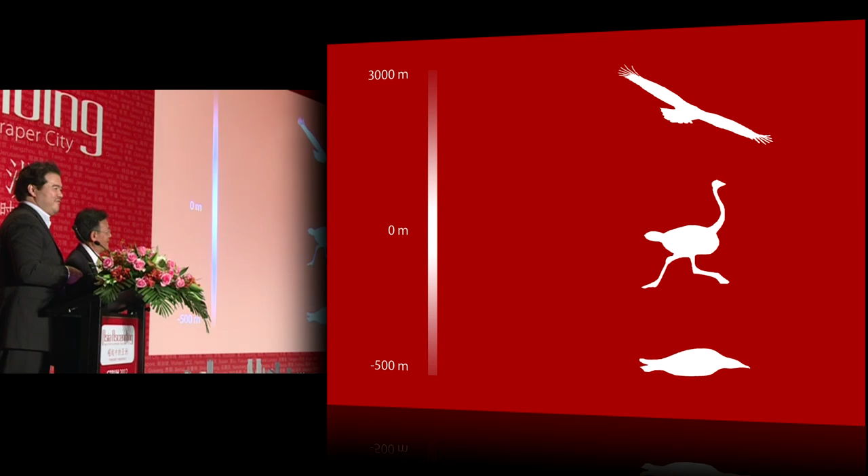not even Dennis Poon can get an ostrich to fly, okay, or a penguin to run as fast as an ostrich, although he might try. Because certainly he's one of the hardest working professionals in our industry. Could you do it, Dennis? Yes. But it might cost the client. We can negotiate that later.

Okay, so architecture and structure. So while on stage, Dennis and I might be very different sizes, on screen you can see our work is very closely aligned. Now more than any other building type, the tall building structure and architecture are inseparable. And it's not a question of passing the baton, the architect handing over the design to the engineer, but it's one of constant back and forth collaboration.

Hopefully these can run. Let's see. You mind clicking on the boxes?

There we go. Okay, this is the Chinese martial arts, Tui Shou. So I thought it was a nice representation of the dynamic between architect and engineer, but also it represents a very important aspect of Chinese philosophy, which is not to resist force with force, but to yield to it, to misdirect the force, and then to redirect it. And I thought that was a very nice analogy to how engineers design the structures of tall buildings.

Because the Chinese have understood for thousands of years, they have expressed the physical world in terms of energy. And I think only now, a lot of people at this conference were talking about the embodied energy of buildings, which Dennis will elaborate on, but the idea that there is a certain amount of energy that's inherent in the form.

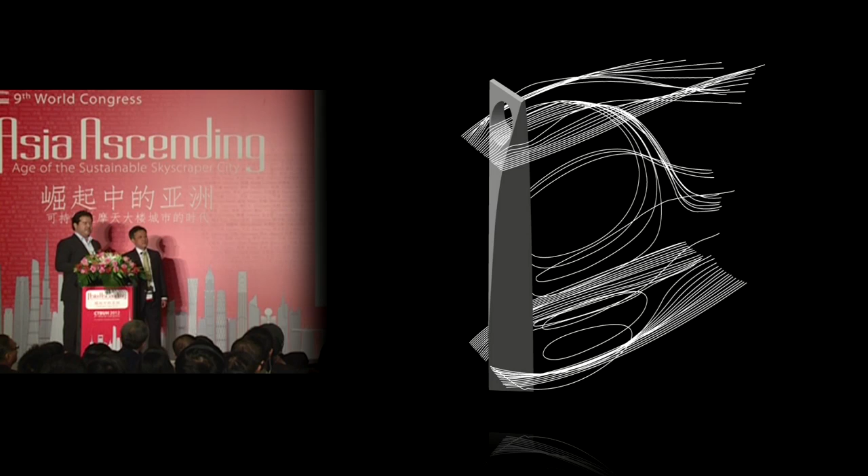Okay, this being a very important project for KPF and for myself, personally having worked on it, but the idea that the building doesn't resist the wind head-on, but yields to it, or more specifically, just allows it to pass through. The moon gate at the top, which was controversial, because it looked like, and this is not supposed to be the Japanese flag either, but this is a sphere. The sphere representing the most compact volume in nature.

So the ratio of the volume to its surface area is the most compact, and a lot of other forms might be compared to the sphere, and it's called sphericity, like how much does it deviate from perfect compactness. So when we look at the Shanghai Financial Center as a benchmark relative to Ping An, you can see the strategy here is to make the building as compact as possible. So it's as if the volumes or the spaces that weren't needed were simply carved away out of the building.

So the building transforms from office at its base, tapers back to hotel towards the top, and then finally at the observation deck, where pretty much you only need window frontage, it transforms into a line. So the idea that the transformation of the mass coheres to the transformation of the internal space is very important from the point of view of understanding that we're not wasting space. So we're not raising volume up into the air that would in turn take on more wind.

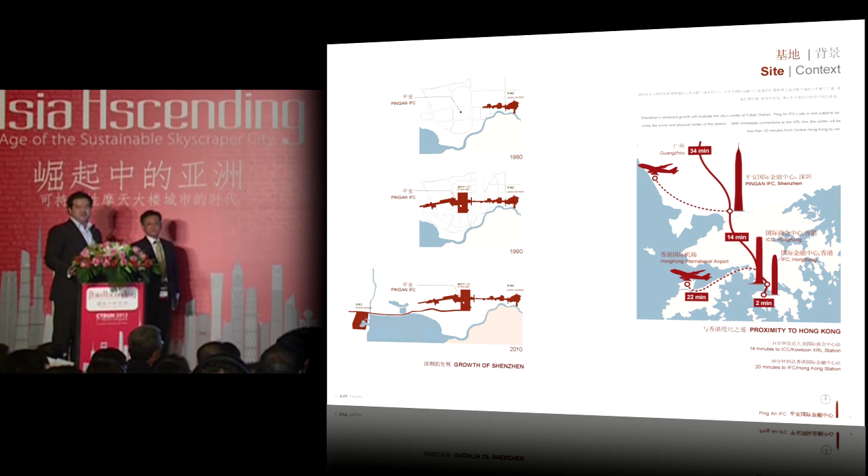Okay, so to understand the project, I think we should talk a little bit about Shenzhen and its context. So Shenzhen, unlike most large Chinese cities, doesn't have a history. It's not a traditional city. It was a village up until about 30 years ago, and then exploded because of its proximity to Hong Kong. So you can see on the diagrams on the left, the river is the border between Hong Kong and mainland China, and the city has developed from east to west, strung along the border.

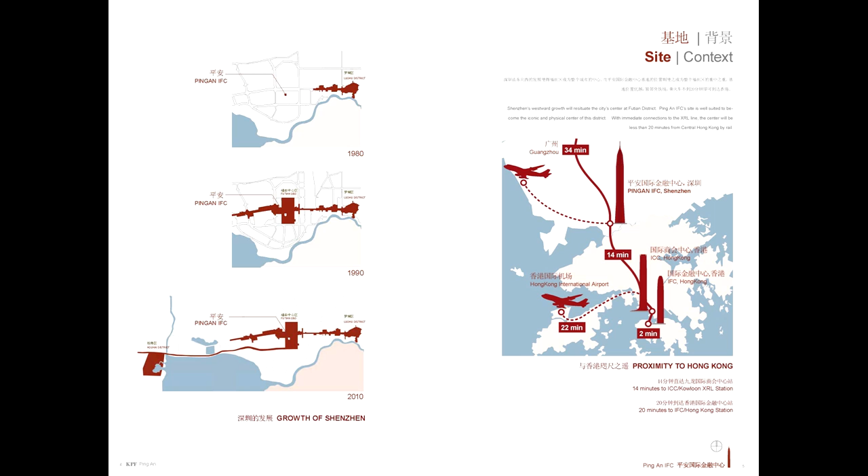This building also only makes sense when you understand it in context, not just of Shenzhen, but the entire Pearl River. So this diagram shows the connectivity of this tower to Hong Kong via the XRL, which is the new high-speed rail link that will go from ICC in Kowloon to this project in 14 minutes, which is probably faster than it takes to go from Pudong to Puxi. And incidentally, you take the train another 30 minutes and you're at Chris Wilkinson's project in Guangzhou. So these towers are not sprouting out at random; they're part of the infrastructure of the entire Pearl River Delta region.

Okay, now the brief of the project. The client asked us to do a couple things. One is that the tower form had to represent the stability and the solidity of their status as an insurance company. The second was that they wanted the form to express the spirit of Shenzhen. So Shenzhen, like I said, is not a historical city, but a city that was formed by immigrants coming from all over China, different ethnic groups, different languages coming together to build something great.

So the idea of lifting up the ground, the notion of pulling the ground up, and then the form of the building taking the path of least resistance, like the Tui Shou. So the form of the building becomes an expression of the material consistency of the building pulled down by gravity. And actually, when we were designing it in Rhino, a lot of times we modeled it upside down to reinforce these lines, to reinforce the idea of the folding of the building from top to bottom.

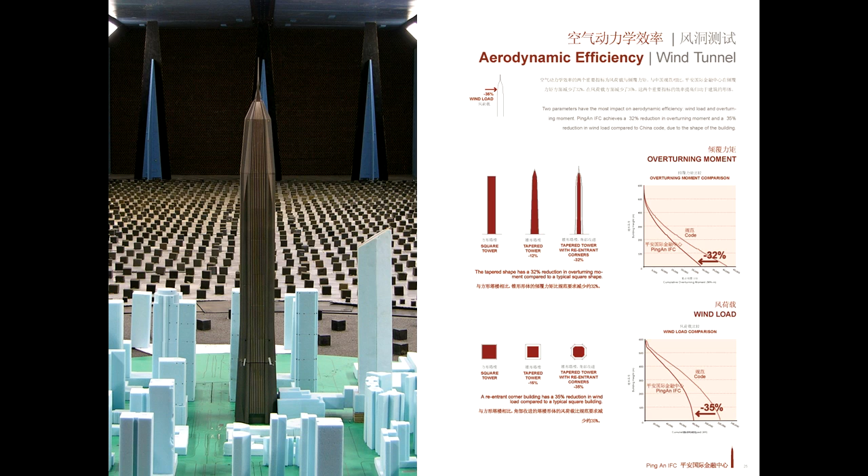And one could have done two things. One was pull the truss inboard, which would have wasted space, but that Tui Shou moment was deciding, why not just push the columns outboard and break the plane of the facade. And actually that had enormous aesthetic implications, but in a very positive way. And we wouldn't have thought about it unless we were listening to our engineer.

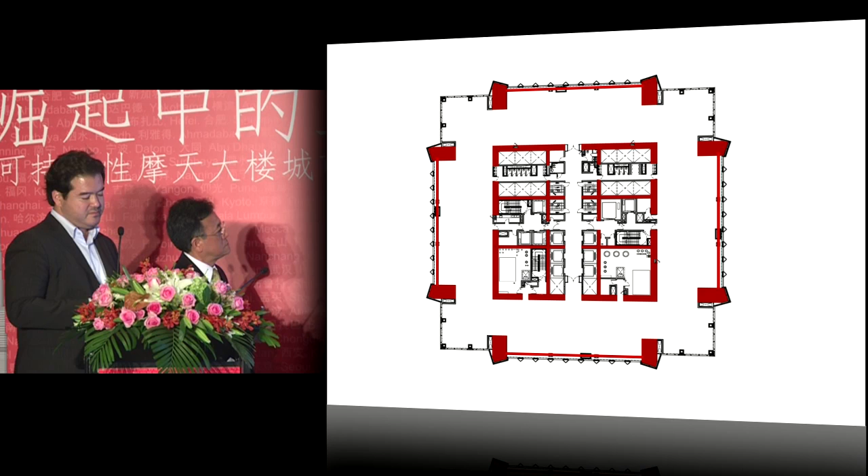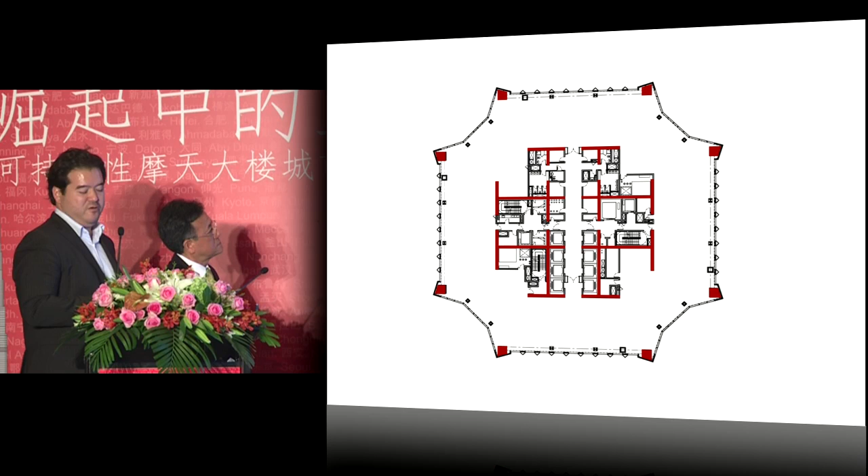Okay, so here you get the idea of the adhesion, so the structure sticking very closely to the face of the building. Okay, and then at the top of the building, you can see the transformation of the corners. So at the very top, we also bevel it, so the floor plate, in the perspective of the wind, is going to look like a circle. So the idea of a rounded floor that performs much better at the high wind speeds.

Okay, and then the transformation of the core as well. So as one manipulates the form for the wind, one also needs to think of its impact on the core. So the entire organization of the core transforms from a square to a cruciform, so that we eliminate that pinch point when we have to bevel the corners at the top.

Okay, and finally, to get to the top of the building, there's a spire at the top. So the spire was kind of vexing for me because it doesn't quite fit into the story of the sustainability and the minimizing of the embodied energy, but it's very difficult to resolve this form without a spire. It seemed to be the only natural way to resolve the form. And it generates complexities because of the galloping effect of the spire as it's blown by the wind.

So what we're looking at now as a team, and this is still ongoing, is to actually look at opening up the spire. So rather than a solid spire, it's a hollow spire. So again, rather than resisting the force of the wind, simply to let the wind pass through.

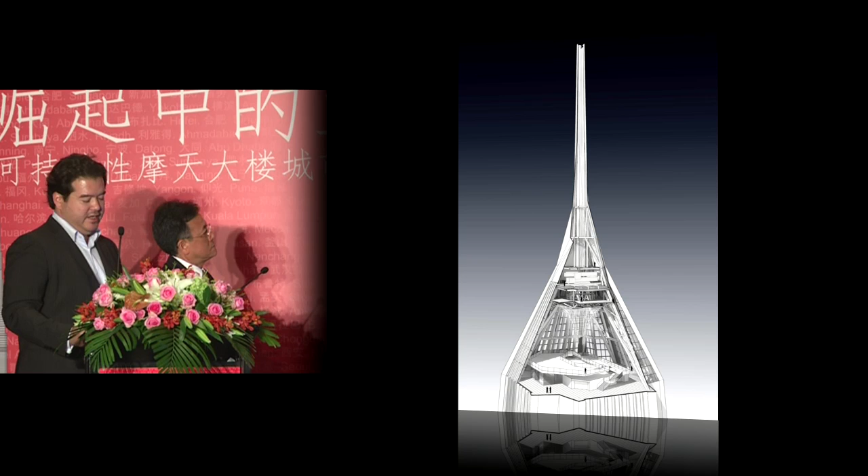Okay, and then finally, just to conclude a little bit on why go this tall. I think ultimately it's because we all enjoy it. As people, we enjoy going up to the tops of these buildings, and we work with the client to convince them to open up the top of the building to the public. So here you can see a cutaway view of the dome. It's a great cathedral-like space for observation and restaurants.

Okay, and finally at the end, the image is all about the people and the participation, the thrill of being at the top of a tall building. So images of my team sort of hanging outside the building with these glass bay windows over the cascade of the building face. So this participating in the tall building is what makes it truly enjoyable.

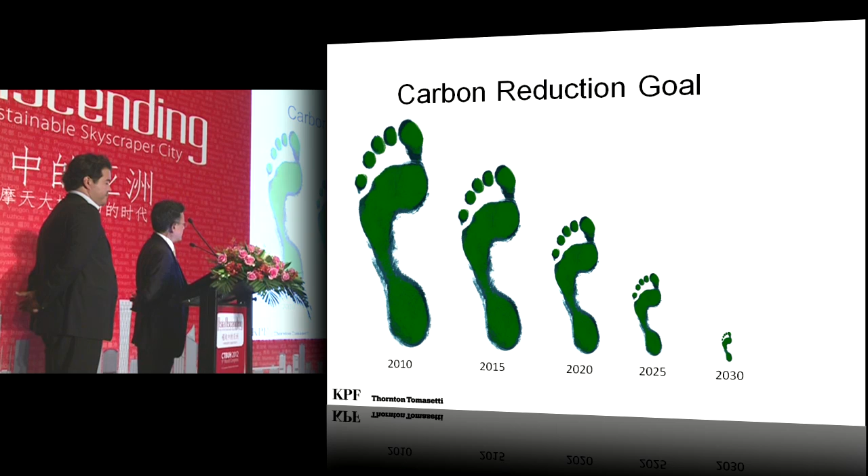So we have the carbon reduction goal. And in today's sustainable design, we talk about two major elements. One is the embodied energy, and the other one is embodied carbon. When you manufacture certain products, you use a lot of fuel oils to manufacture this product. And the byproduct of this manufacturing is causing a lot of carbon emission into the atmosphere.

So we try to limit this carbon emission. And that's why we try to use the right material, and also we have to limit its transportation and its manufacturing costs, because each one will contribute to the environment. Okay, you can see nowadays what is contributing to our carbon emission is in different areas.

Now, when we design the building, it uses up so much basic energy, because when you use a lot of steel, it consumes so much energy. When you use so much concrete, you also consume fuel. But after that, you're talking about the building operation, just like Mr. Job, the owner before. It costs millions of dollars to operate a building with mechanical system and operating system. So we have to pay attention to all of that.

Structurally, the envelope percentage, you talk about almost 28% of the embodied energy; site work, construction, finish, and structure accounts for 21. So we have to pay attention to every aspect. And during the design process, we go through this together with the entire team. Now you can see the energy cost.

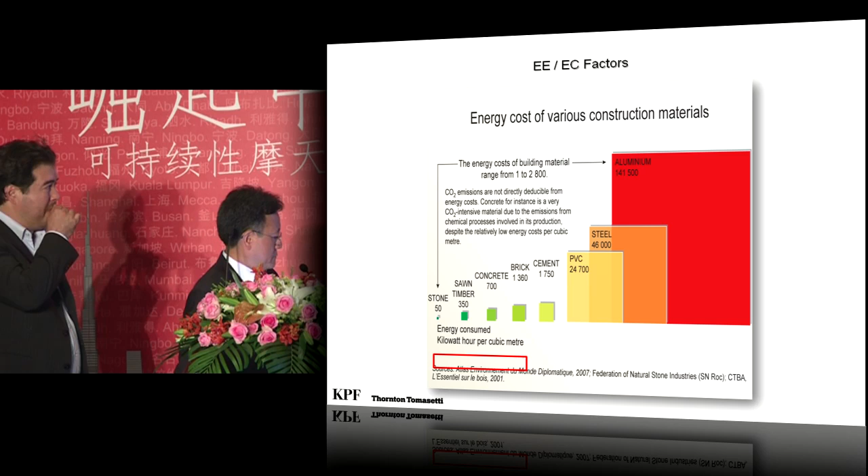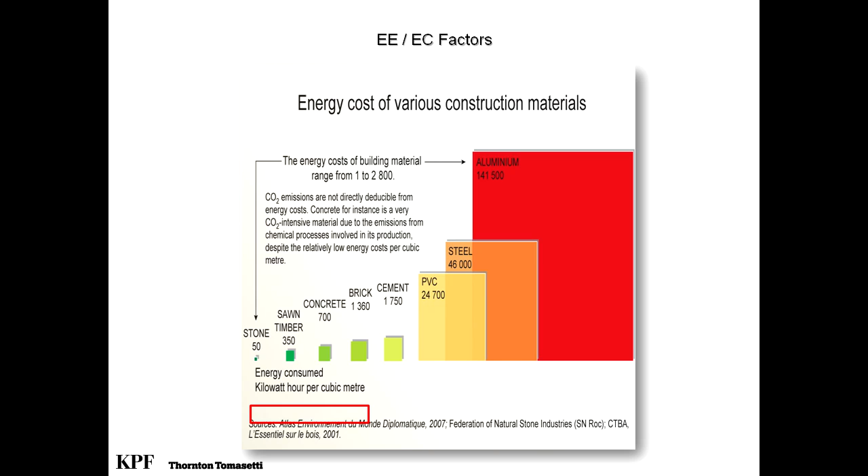If you use aluminum, it will cost this kind of energy. Steel is the second culprit. You use so much. PVC, and then if you use cement, you can see with cement, you use a lot, you have better environmental impact. And cement is much cheaper in China, and the labor cost is cheaper. So we try to strike a balance in the selection of materials.

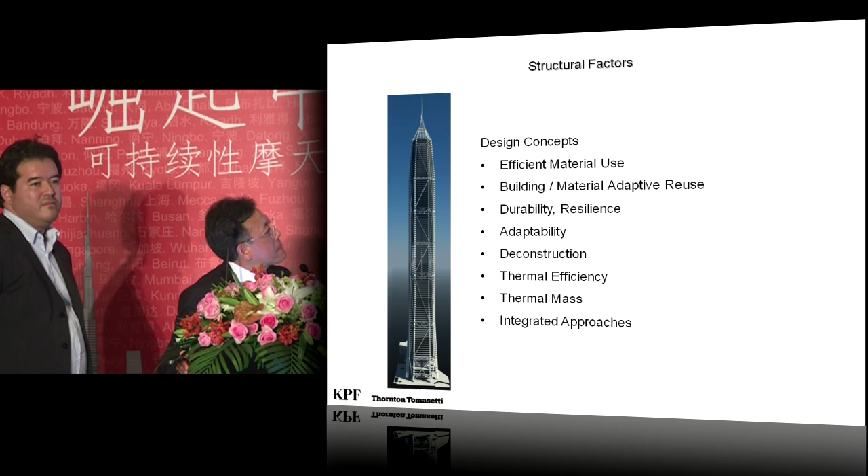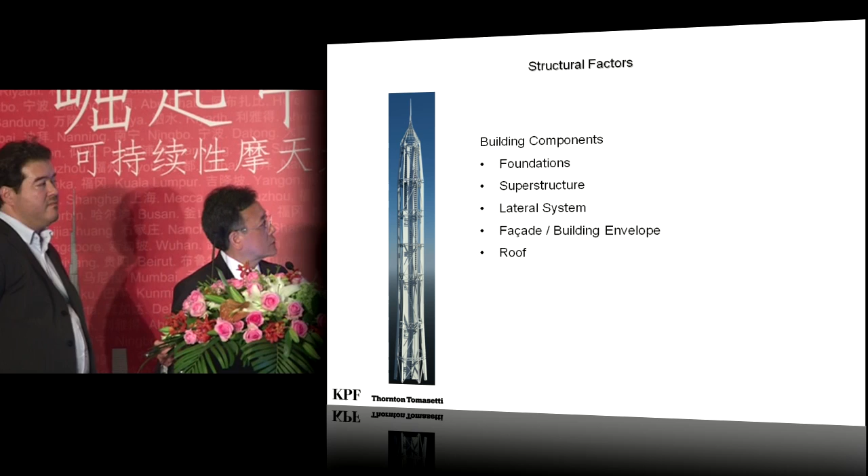Now, for this project, eventually, after months of work together as a team, we have to use the most efficient material, and durability, adaptability, deconstruction, and so on. Foundation is a challenge, okay? The site is very, very tight, so we cannot have a large mat. So we have to deal with foundation, then the superstructure has to deal with architectural requirements, and then the facade.

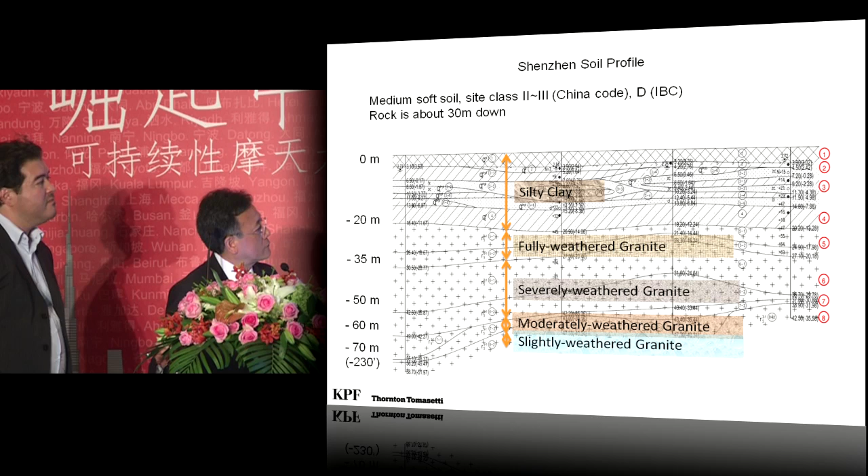To summarize it generally, we try to have a deep foundation with bored piles all the way down to the weathered rock. The mat is supported by the piles. Okay, we have the hand-dug caissons, and on top of that, we have a thick pile cap.

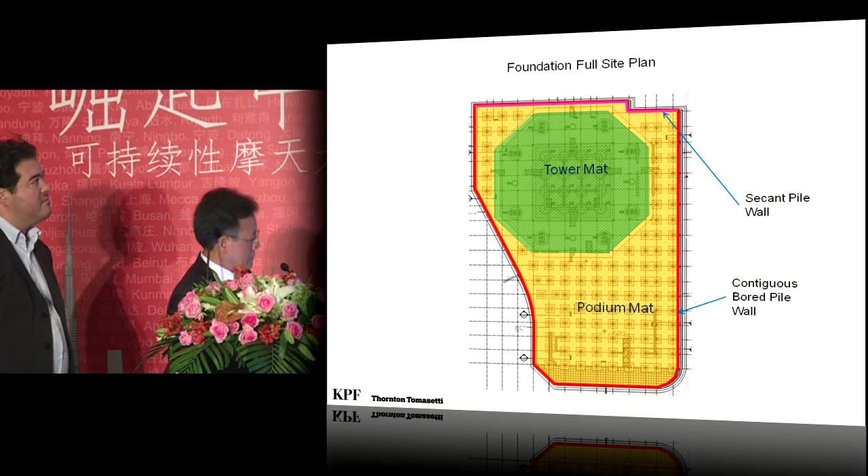Now, this is a layout, and we try to use big diameter bored piles in order to spread the load. And it saves a lot of labor by using deep bored piles and large diameter all the way down to rock. In the podium, we are using the regular smaller pile system. So what you see is a very simple outcome of engineering with a lot of analysis getting into it, with the optimized design.

And we study all kinds of behavior of the mat foundation, including the base rotations and so on, and flexibility and the spring constant. All kinds of engineering were built into it to make sure we have the most optimum design, not to waste any construction material.

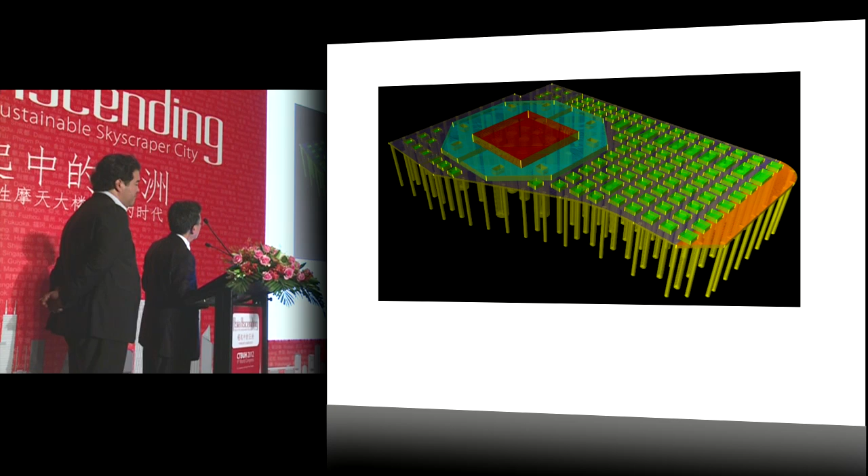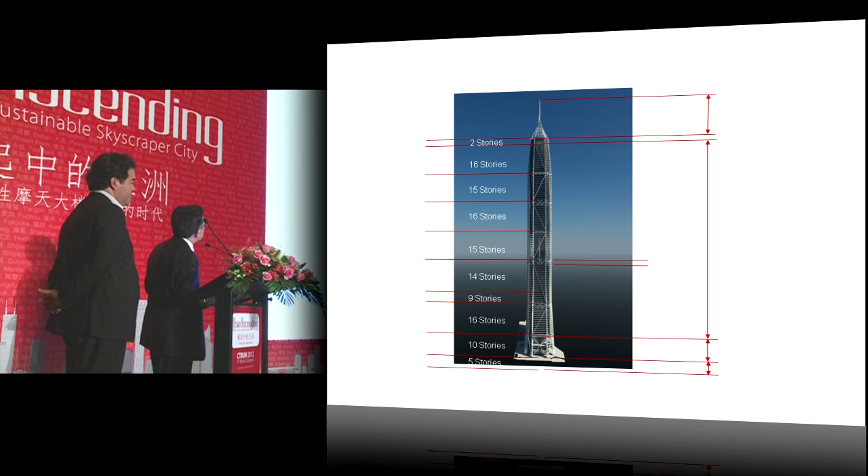Now the building is separated in different zones, and the structural system is mainly a concrete core, composite concrete core, working with outriggers, and also a mega frame outside formed by the belt truss. And in addition to that, we have a secondary diagonal bracing to enhance the stiffness of the building during earthquake as a secondary system.

Well, the main thing is architecture and structure to be in harmony. Every step along the way of engineering, we get to work with the architect, as David has pointed out. So the location of each outrigger truss has been carefully studied with numerous options when we come to this final design.

We have done a lot of three-dimensional analysis, with BIM modeling as well as 3D analysis, which enhances the optimization process with the architect and mechanical engineers. At the end, you can see what a simple engineering product and architectural layout it will achieve.

And if you look at the lateral system, we have the core. This is the mega frame formed outside, conveniently located at the mechanical levels, and then we have all these diagonal trusses. Even the truss configuration has to be worked out in a simplified way to fit the architecture in order to minimize the obstruction of view for this super tower.

Now, the concept of using an outrigger and a core is very simple. The core itself is not stiff enough for a 660-meter tall building. Just like when you try to bend a pencil, it's not stiff enough. But if you try to bend a pipe, it's much stiffer. So we work out the outrigger system, and with the belt truss. The belt truss is forming the mega frame outside the building, which forms like a frame for the secondary system.

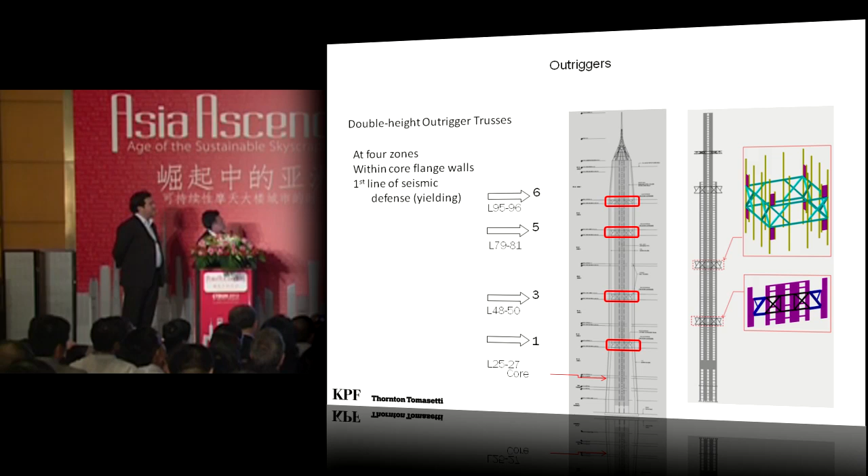This is the mega brace. Well, people will ask, why do you need a mega brace? Because is your core stiff enough? Is your bracing stiff enough? We have to deal with the China code. This is something that we can discuss later. Now, different codes have their own provisions, and different locations of the project will have their own projection. For this, in order to meet the seismic requirements and the wind load that we have to deal with, we have to introduce this mega frame.

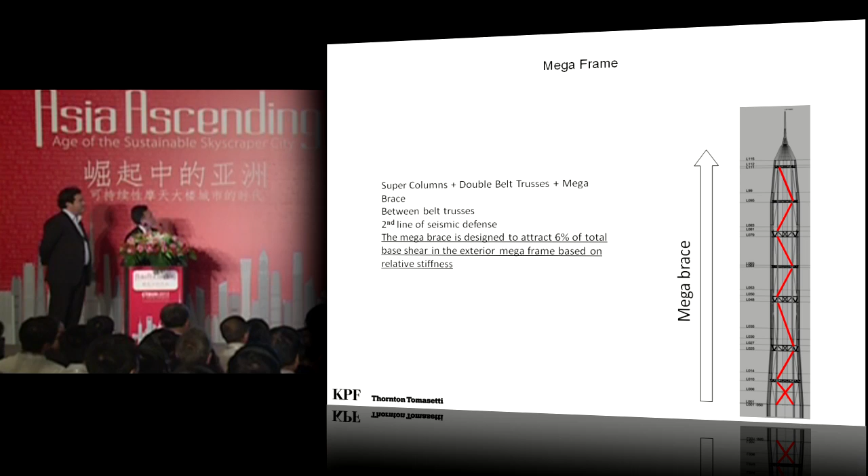Shenzhen is located north of Hong Kong, which is subject to very high wind load. And if we make the core too big, to make it stiffer, it will decrease the efficiency of the floor plate. So we are working with the architect and came out with a solution to have this mega frame and this mega bracing. Now, the structural system will be kept as simple as possible. Basically, we have a core. We try to line up the outrigger system so that we utilize the whole width of the building in each direction in a very symmetrical way to resist overturning, the wind load, and seismic load.

Now, in addition to that, we have a belt truss at the mechanical level every 14 to 15 stories. And this belt truss is about 2 stories deep that forms the mega frame in addition to the very lightweight mega frame system. Now, you can see, as David said, we try to push out the mega column, which again, we use less concrete to reduce the carbon footprint. And we try to use high-strength steel to save the material. And then with this working together, we have a very efficient structure and low tonnage.

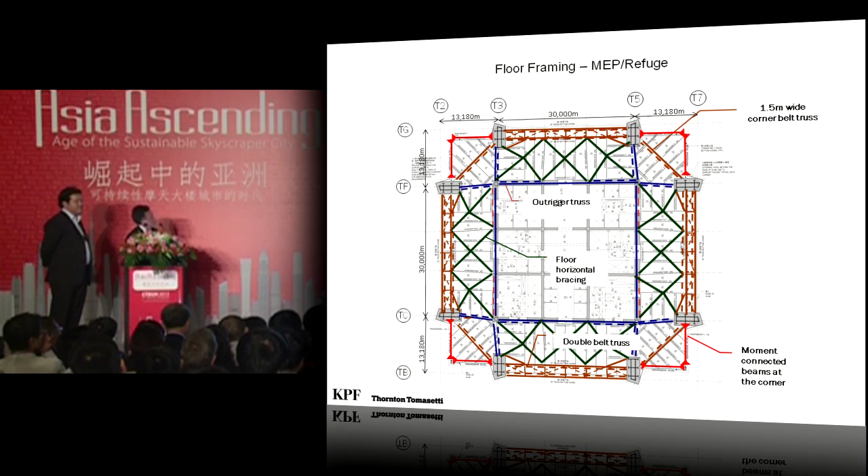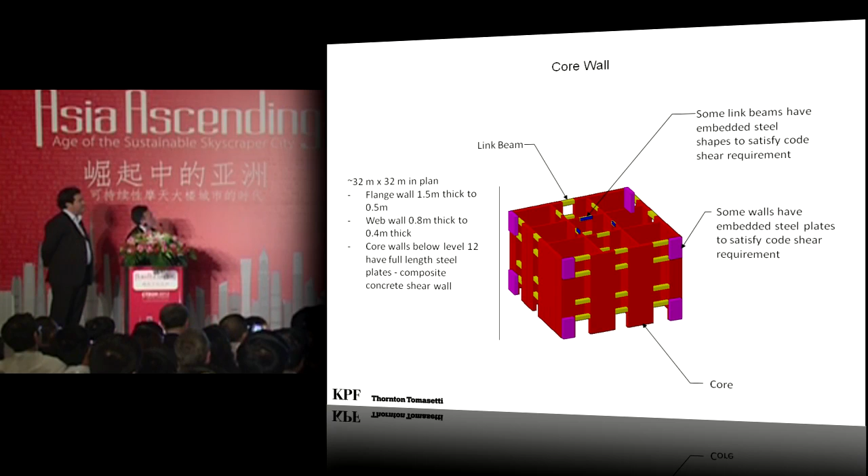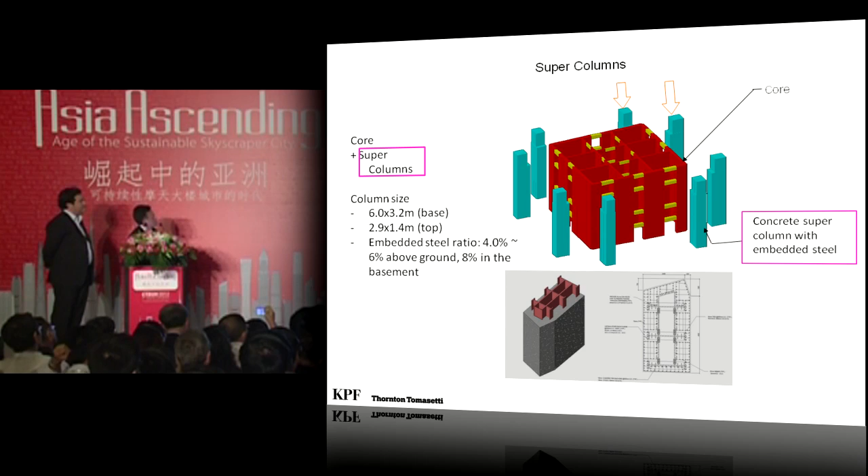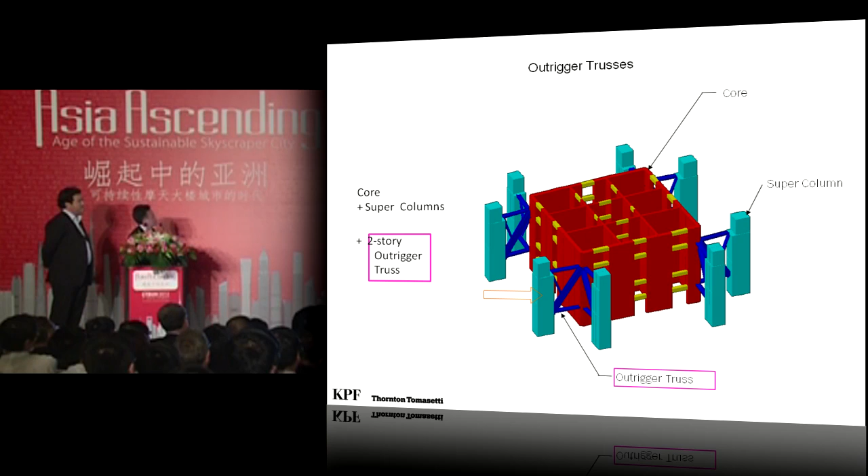But along the way, we went through many obstacles about how to meet the optimum design. So we have to perform a lot of in-depth analysis, working with the experts in order to come up with this design. This is the core with the link beam. And in some places, we have embedded steel plates to enhance the strength of the core. Again, structural optimization is being done in every step of the way. We also have to look at simplicity of construction. So when we do the detailing of the steel and the structure, we have to bear in mind how to make it simple for steel erection and coordinate with mechanical engineers.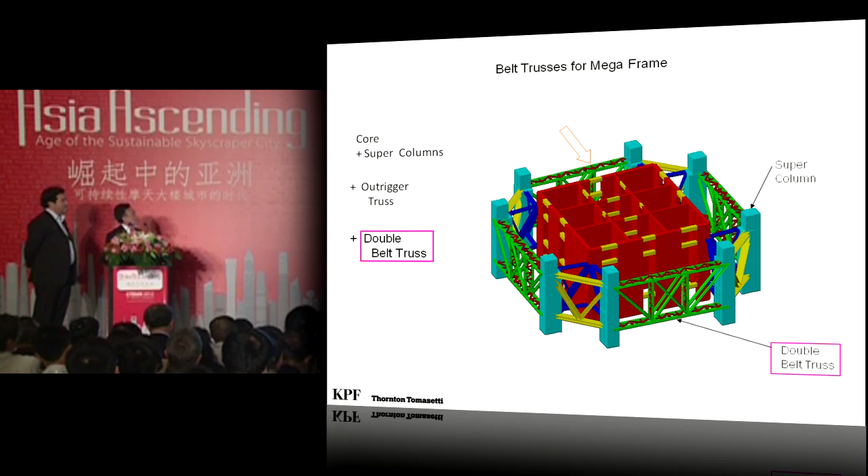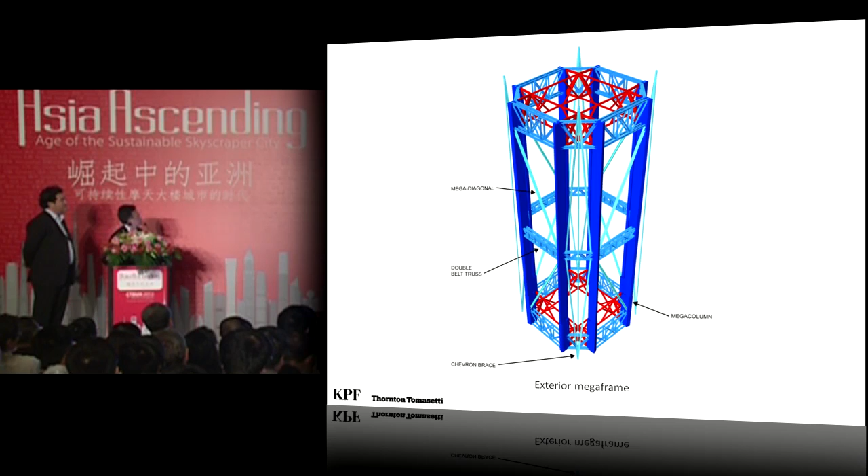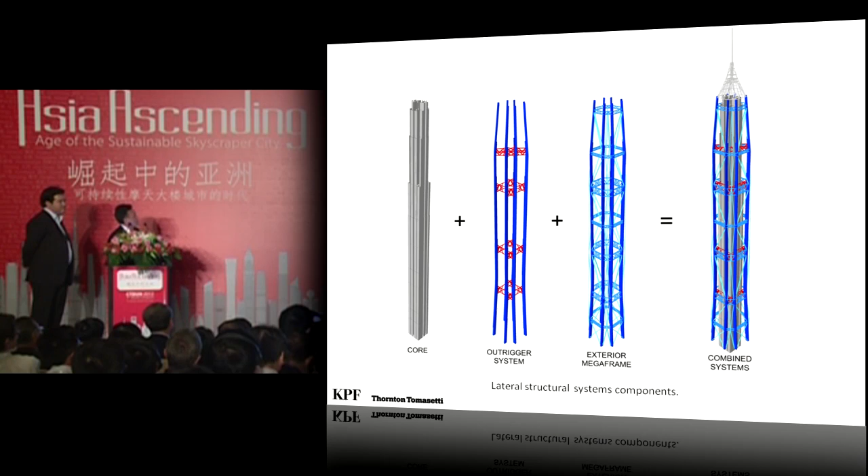You can see this may be a lot of typical design principles that every one of you will know how to do. But when you go through the process, the amount of depth of work is different for each project. So with the core, with the mega bracing, with the outrigger, the mega frame, we have successfully designed this building that works for architecture with the function requirements set by Ping An Insurance Company. Again, we have to deal with earthquake. Shenzhen is 7-degree earthquake, so we have to deal with that also on the dynamic aspect.

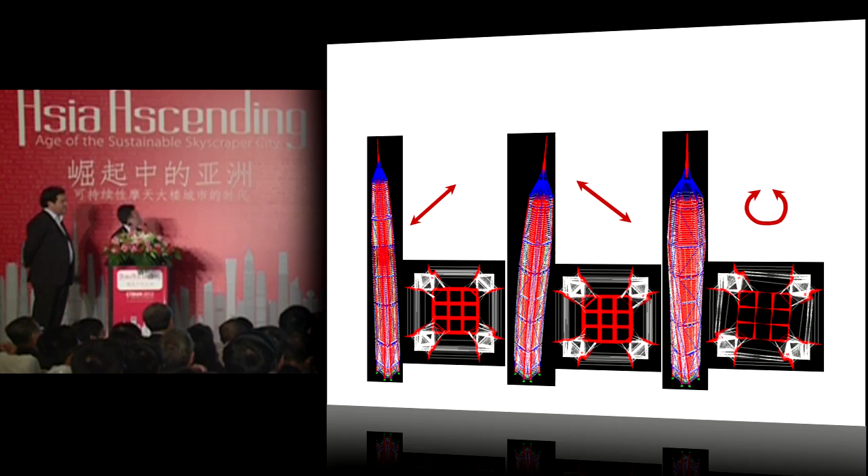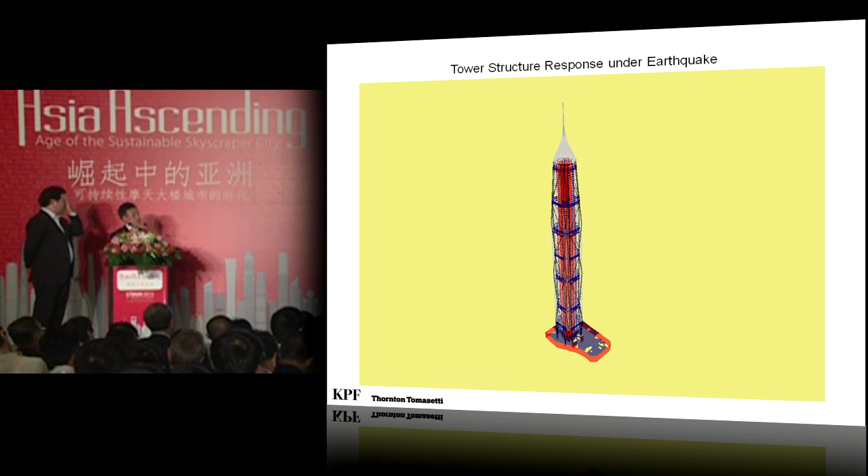So seismic design is another important design criterion in China that we have to deal with. And we have to do nonlinear analysis, performance-based design for optimization, that everybody thinks, yes, I know how to do it. But this time we are working with the experts in China. We do site-specific analysis. We do a lot of geotechnical testing. We work with the experts on coming up with the most appropriate seismic curves for this project in order to do the correct, most appropriate earthquake design for this project. So we had to emphasize that you cannot apply what you have done on the previous job to the other job, except with your experience. So the design criteria can be different on each project.

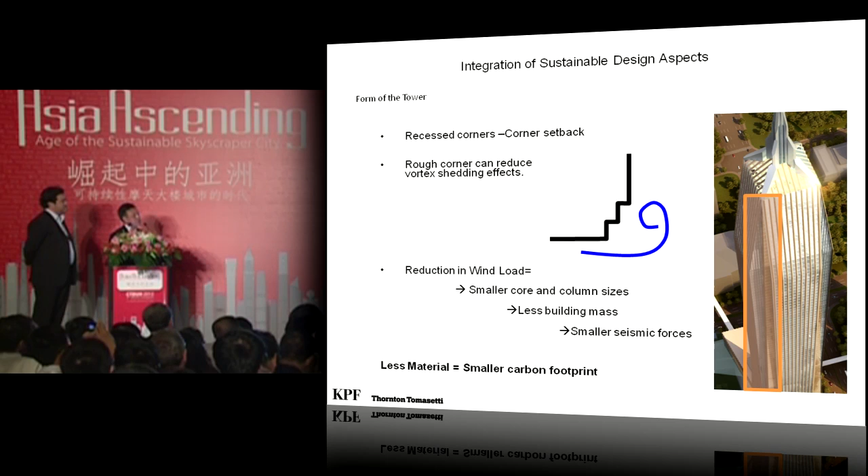Now again, we went through a lot of work with KPF and David on the geometry of the building, the amount of tapering of the building as it goes up. How do we treat the corner of this building? How do we taper it to reduce wind load, working with the wind tunnel engineer?

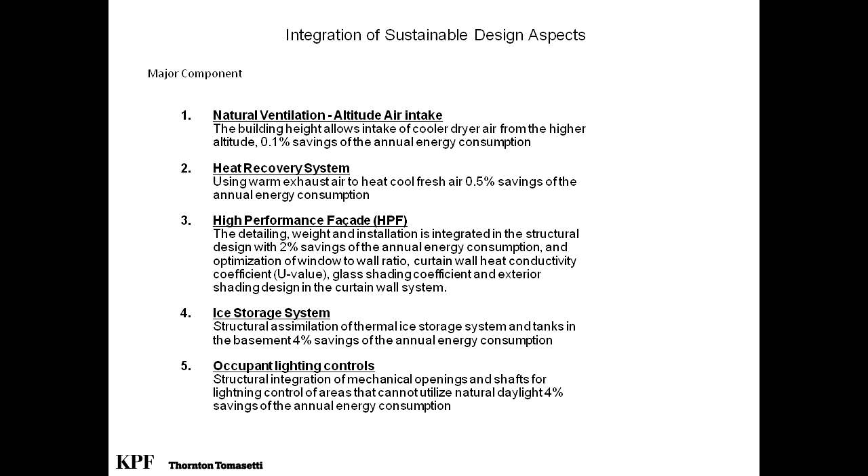On the other aspect of the design, we have other contributions for the sustainable design, such as natural ventilation. We have a heat recovery system. We have a high performance facade. We have ice storage, and we have occupancy light control. So you can see a whole series of sustainable design engineering has been built into the project.